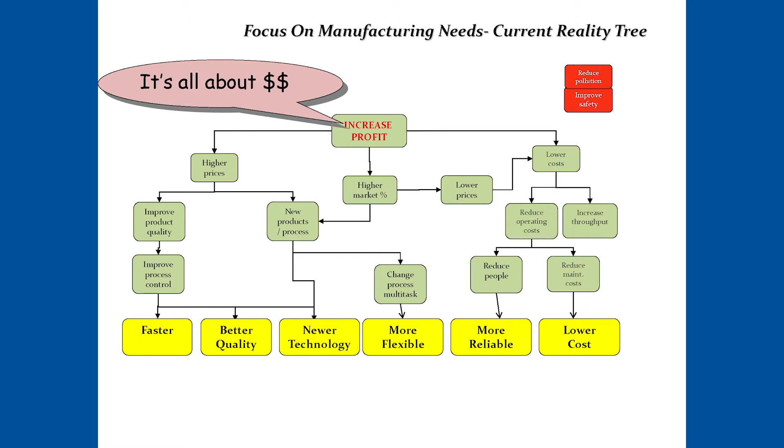As Joseph mentioned a moment ago, we have roughly 22,000 analyzers installed at Dow with a replacement asset base of about $1 billion. So if you ask our clients how important that investment is, I can promise you they're very, very keen on what we can do to keep those assets competitive.

In order to achieve that, oftentimes we have to think about how we compare to our competition. Because anybody with a big enough checkbook can buy a GC, they can buy an IR, right? So if everybody has access to the same technology, the same people, how do you win? Why you win is by identifying the most valuable opportunities to optimize the process, but also doing it better and faster than the competition. So a lot of our time is spent inside of the Dow fence trying to understand what are those opportunities and where are the benefits.

I would submit to you that that's the rate limiting step in continuous improvement. It's not necessarily the technology, although it's a key component. It's also understanding where are the constraints in your objective to make money. And the other fact of life today is that the EPC firms—engineering, procurement, construction firms—although they serve a great purpose for us, don't have the skills or the depth and breadth of skills in analyzers to do that to the extent that our clients need it. So oftentimes the burden is on us.

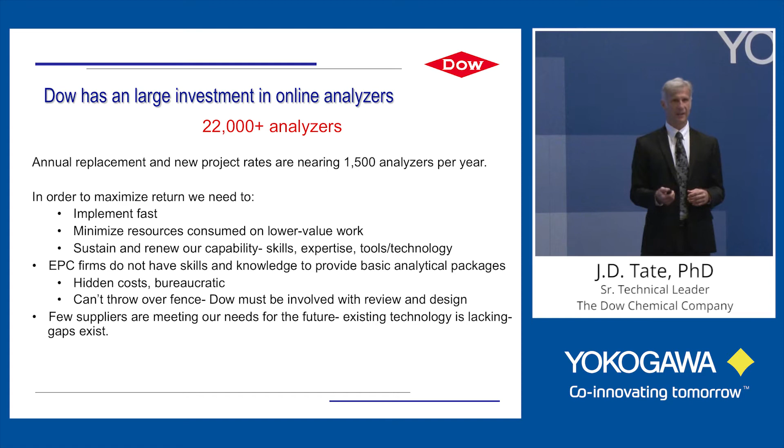If you look at the history, the evolution of analyzers in the industry, a lot of those analyzers came from the chemical industry or the refining industry. The GCs, for example, came from Phillips Petroleum years ago. It became Applied Automation in Bartlesville, and now Siemens owns that. There are many other examples like that. So necessity is the mother of invention.

I'm going to cover this real quickly because we agreed to compress our time here, but I think you'll recognize these in your own companies: there are basically three themes in the industry—operational excellence, capital efficiency, and life cycle management. That really is what everybody is doing. It's almost like communism, I think, in the petrochemical industry. So that just means doing more with less.

We also have some other corporate initiatives in Dow. One of those is energy efficiency—70% of our operating cost is associated with energy consumption. And of course, increased reliability. Reliability inside of our company sometimes has become a religion, but people forget quickly that it's a means to an end. You can make your plants 99% reliable, but it doesn't mean you're making money. So you have to choose wisely where you spend your time to improve that reliability.

And online analyzers are part of that story. Because one of the barriers to improvement is we have a culture of fixing problems, not avoiding problems. So we get rewarded for being heroes. Marcus and I were talking about this yesterday—we get rewarded for being heroes and fixing a problem, whereas the guys that avoided the problem, it's almost invisible. Nobody even knows that they avoided it because it didn't happen.

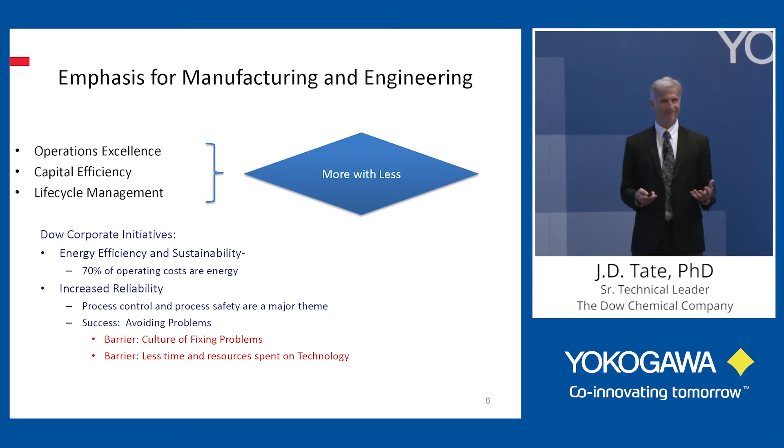And then less time and resources are spent on technology. So that's kind of where we are, kind of a chicken and the egg situation. So what are the needs and challenges?

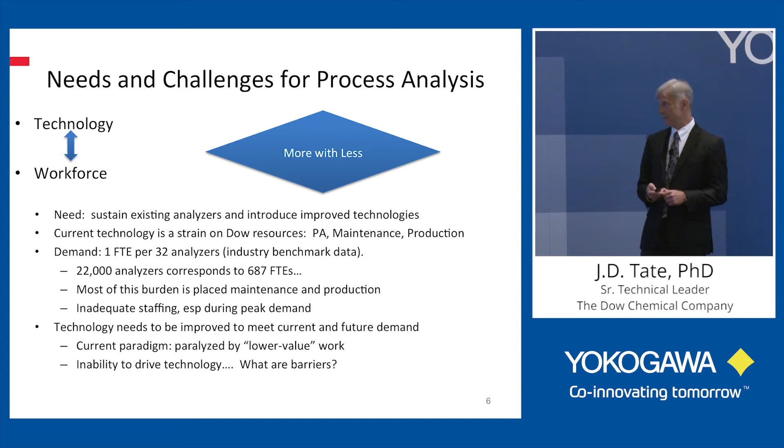Another really big challenge in our industry is the workforce. There's a trend for all of us to figure out how to cope with that paradigm, because our management isn't giving us permission to hire more people. In fact, they're challenging us to live with what we have and see if we can cope with that.

Here are two examples. On the left-hand side is a sample system. I couldn't tell you which process or which application that is, but lots of moving parts. Very complicated. It works really well when it's maintained, but somebody's got to walk by that thing and make sure that everything is working properly.

You'd be surprised how many times there's this ignorance is bliss. They don't know that the thing is not working. They get a number out of the analyzer, and they're fat, dumb, and happy. You go out there and discover, well, there's no flow. And if you had a smart sample system with diagnostics, you would know that there was no flow, and somebody would take action based on that information.

So that's the trend in the industry today, moving away from dumber devices to smarter devices with automated self-diagnostics, so that you have some credibility in your numbers and can trust the data. Trust usually means that analyzer is providing useful data to operations more than 99% of the time.

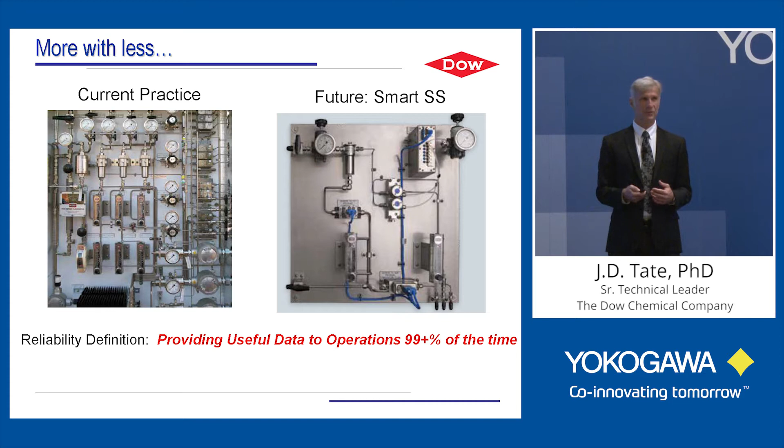If I asked you if your car didn't start one day out of the year, that's like 1 out of 365 days, you would say it's a piece of junk. You'd probably take it back to the dealer and say, this thing is not starting, I want my money back. And online analyzers are even more so. It's amazing to me how much we're willing to tolerate that unreliability.

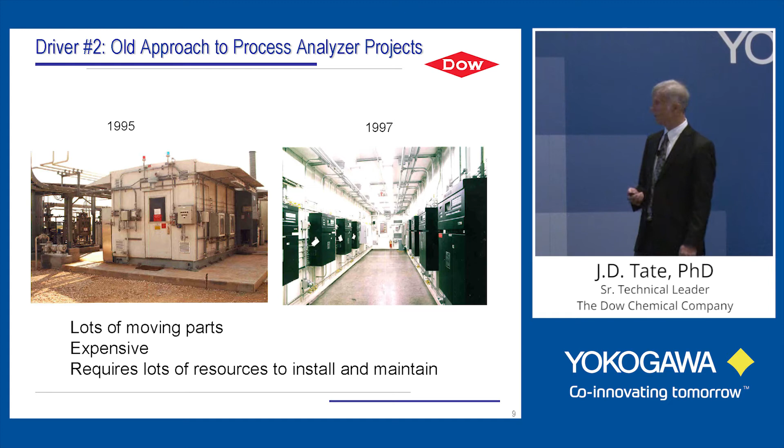Here's a picture of two pictures back in the 90s. Analyzer shelters. These were very well-designed, climate-controlled shelters. The one on the right is a bank of GCs in a hydrocarbons plant. Well-controlled, worked really well. Well, that was in the 90s, and this was just earlier this year. So it really hasn't changed much in the last 30 years.

And so, again, when we think about where we need to drive the technology, this is a clue. I'll show a story in a moment, but just to paint the target, I'm going to get through this really quickly, if you'll forgive me.

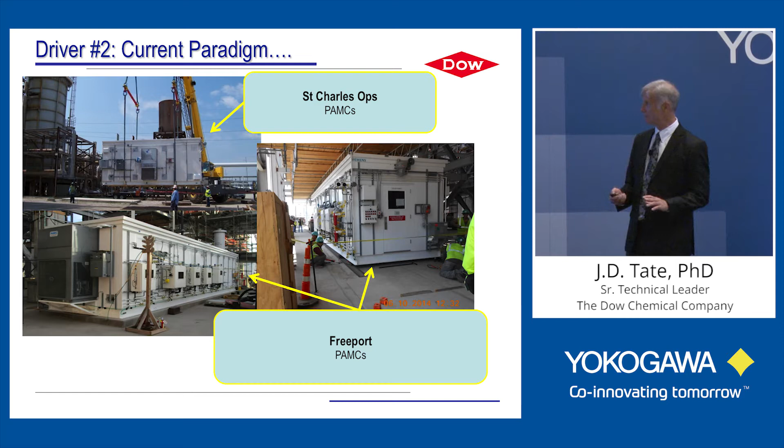Now, if I contrast that to pressure, temperature, and flow, right? You guys know this better than me. Dow, by comparison, I asked our instruments guys how many pressure, temperature, and flow devices we have installed. The answer he gave me was 700,000. That sounds low to me. I'm guessing it's more north of a million.

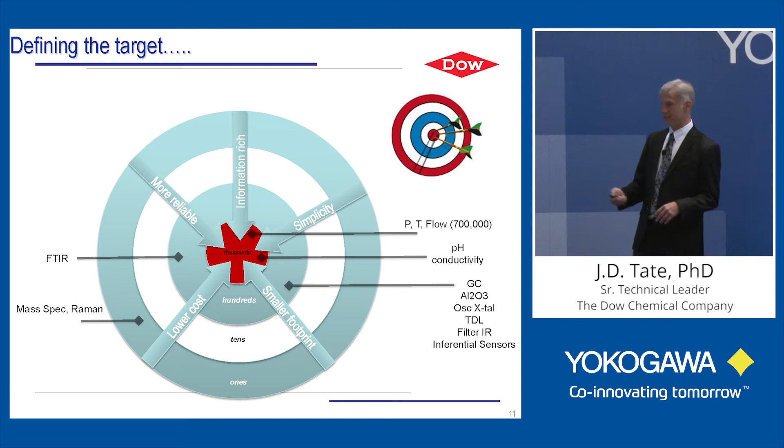Just to make the point, we have 22,000 analyzers, and in our industry, that's considered a big footprint. But we have more than 700,000 pressure, temperature, and flow devices. So our clients want to use analyzers. They have a desire to use analyzers, but there's a barrier. Cost and complexity, the footprint, all these things I have on this slide are those barriers.

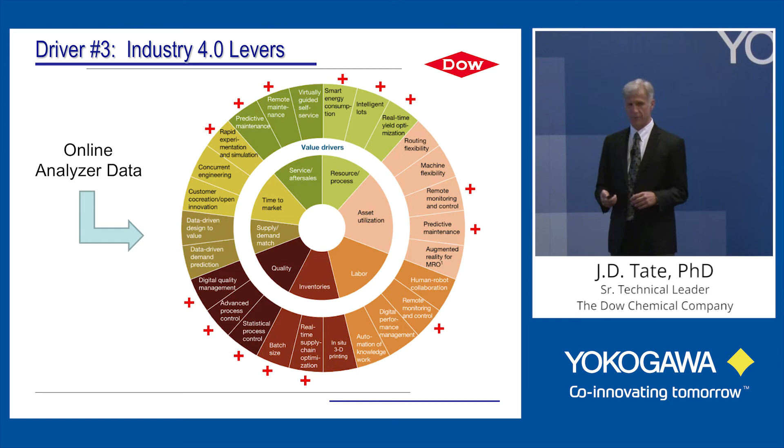Here's one of the other drivers I think you'll all resonate with, this concept of Industry 4.0. You can look at all the value drivers for Industry 4.0, and I would say most of those intersect the objectives or benefits of online analyzers, including optimization, predictive maintenance, you name it. So there is a goal that's lined up between that vision and this enabling technology.

But there are some things required to take us from where we are today to that vision. Some of those are reducing the cost, complexity, and customization. There was a time when we had our own instruments group. We would build these analyzers in our shop, build the electronics, the software, integrate all the components together, and install it ourselves.

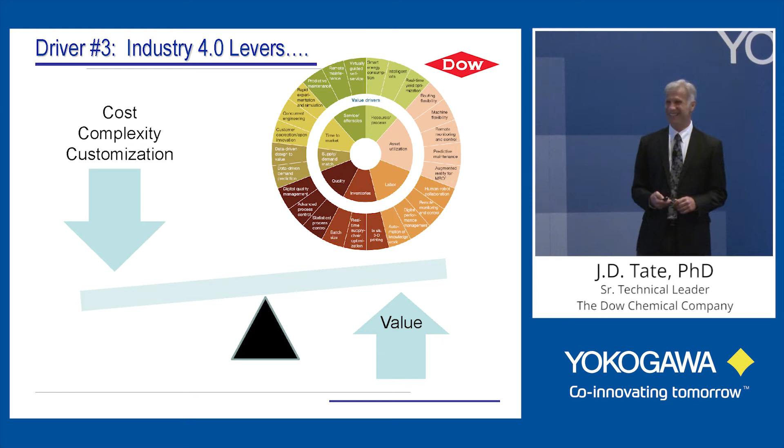We don't do that anymore. We can't afford it, and the industry can't afford that. And we still have some of those legacy systems in the field today. It's amazing. So that's one driver.

The other driver is keeping our assets competitive. A lot of our assets are near the end of their life, and one day will come when the analyzer doesn't work anymore, and our clients need to fix it. And sometimes the analyzer, you can't even buy it anymore.

It doesn't exist. We started buying old computers off of eBay because the new computers are not compatible with the old software. And we'll pay a premium for those computers because, I hope I'm not telling anybody that owns those computers, we need those computers to keep that asset reliable.

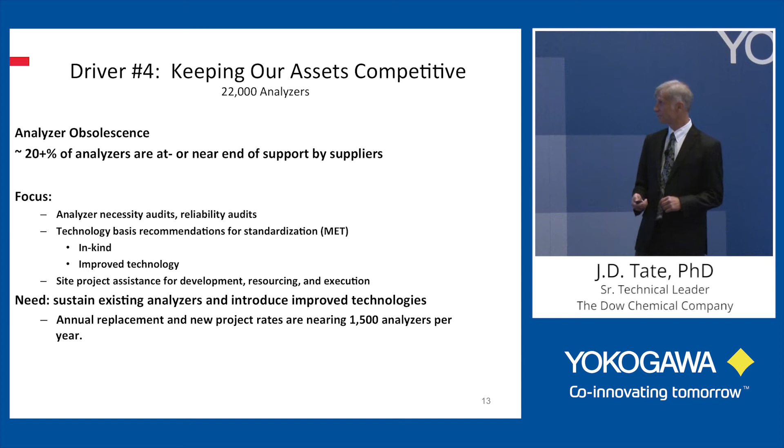So, keeping our assets competitive. I show this slide, and sometimes it upsets people that are in this list, but it applies to a lot of folks, not just these guys. It's true that a lot of the technologies we have today are very successful, but they really haven't changed much in the last 30 years or so. GCs, IR, there's a few examples. I think TDL is the most notable example of change, but there aren't many examples like that.

So I can summarize some of our drivers, some of the key requirements for our analyzers. We need technologies that don't require expensive analyzer shelters. We need analyzers with faster speed of response. We need analyzers that don't require sample transport. If you could put a probe in the process and not transport the sample, you've solved a lot of problems - sometimes you've created some problems. It needs to be more reliable, lower maintenance.

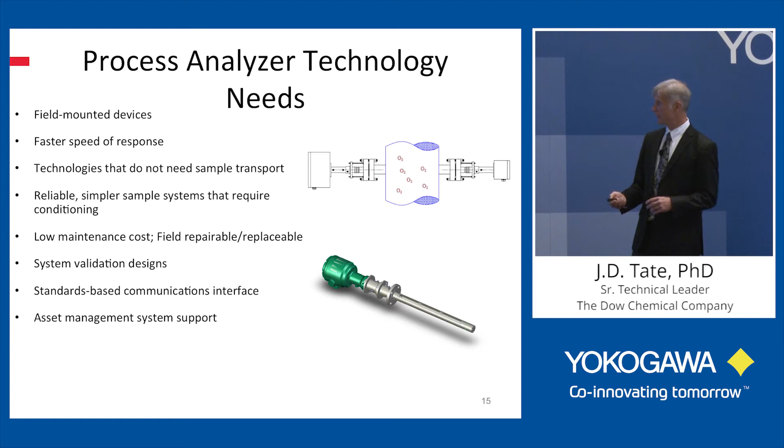More standardization, and asset management support systems - having these as part of what we call a process analyzer resource management system, where the maintenance guys can look at that and say, yeah, this analyzer needs the filters plugged, we need to go out there and fix it. These are some of the ideas. We can drill down into some of the nuts and bolts here.

So this is our vision of the future. Again, I showed you that slide of the modern analyzer shelter. It works really well, provides useful data to operations - they trust it, makes a lot of money for the company - but there's a limitation on how many of those we can afford and how many we'll tolerate.

And so there's a trend in the industry to move towards more field-mounted devices - things that don't require a great deal of support and demand on our time and resources. This one shown on the right here is an in situ probe placed on a piece of fired equipment, and there's more and more of those coming out today.

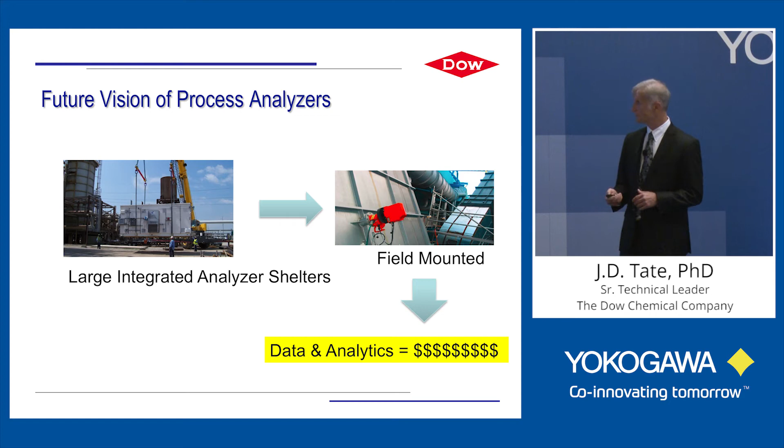I want to make a point here, that it's not really a new concept to have field-mounted devices, right? That's been around quite a while. And one of the best examples I can think of are the shelterless GCs.

I don't know if some of you are familiar with the old Daniels GC that they used in pipeline, liquid natural gas. They have thousands of these things installed in the field, don't require an analyzer shelter, and are very reliable, and provide a lot of useful information to the client. But it hasn't enjoyed widespread success in the chemical industry. There's been several products on the market, several companies that have developed their own version of the shelterless GC, and we have a few of those installed, but not many.

And the vision there was that instead of having an expensive GC in a climate-controlled shelter, we would place this thing at the pipe and get the benefits of not having all that infrastructure, and even having a modular device where if something failed, you replace it with another one, and you're not doing field repair.

And I had a lengthy debate with our clients about this - that there's still a psychological barrier to that paradigm. They're used to doing field repair, and if you're going to do field repair, especially in Texas, you want to have a nice climate-controlled shelter, especially when it's raining or there's mosquitoes or whatever out there, right? You want to have a place where you can perform the maintenance. That's a different mindset than having a device that's mounted at the pipe, and if it fails, you don't do repair in the field - you swap it out.

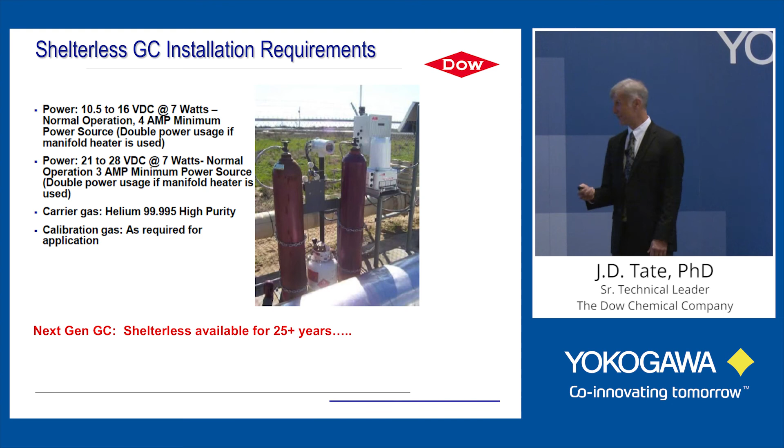So a good benchmark is the zirconium oxide sensor, right? This is something that can be mounted in the field without a PhD. It works. Now I know Don's going to look at me crazy and say, why are you still using Zerks? You shouldn't be using Zerks. And I agree with him, Don and Ryan too. But we have an answer for that, right?

But it's a good standard. I mean, every car has 2 or 3 of these sensors installed on them. They work. They're very reliable in their application. They had some drawbacks, and we can talk about that. But as far as a goal, when this technology became available back in the 80s, it revolutionized combustion control. And I think our goal is similar in other applications besides oxygen.

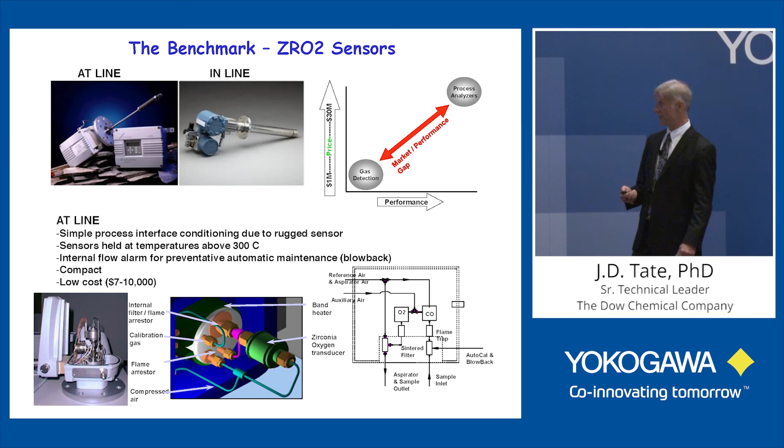Here's an example. I think this is an e-book that I stole liberally from our friends at Yokogawa. Thank you, Joe and Ryan. That describes the benefits of this technology.

It's interesting to me because maybe 5-7 years ago, there were very few suppliers in this market. There were a lot of suppliers that were selling into that. I mean, the first time I saw this technology was in environmental monitoring. They're using open path monitors to monitor fugitive emissions. And so you could monitor a large area of space in a short period of time at a low cost using these open path measurements, up to 1 kilometer or more path length.

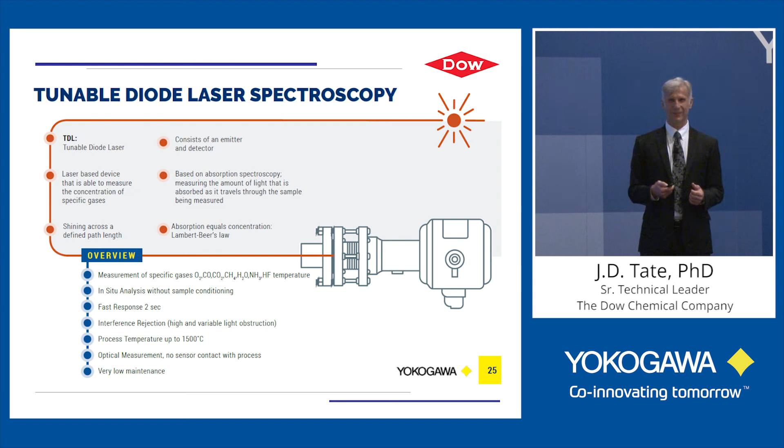But nobody had discovered the benefit of applying this in the process industry. There were some examples in the power generation market, but today you go to most trade shows, and there's maybe a dozen suppliers out there today that are trying to jump into this market because they see the benefit.

And one of the reasons is because it's a very reliable device. The laser source itself is telecom grade components. We're leveraging a mass market from the telecommunications industry that just happens to overlap, fortunately, with some very important compounds in the industry. Oxygen is one of the most ubiquitous compounds in the chemical industry.

Everybody wants to monitor oxygen. Everybody wants to monitor water. Everybody wants to monitor CO. So it's convenient that this technology is able to monitor those, and it can be mounted in the field and doesn't require an army of PhDs to maintain.

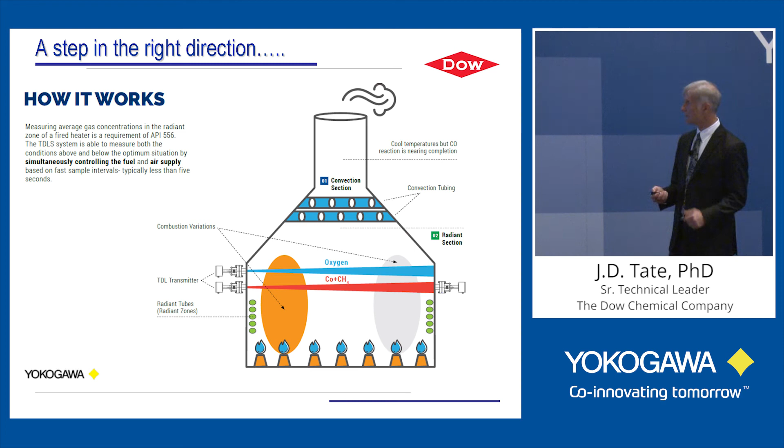We have hundreds of these installed at Dow, and they're slowly taking over a lot of applications that were traditionally paramagnetic analyzers, electrochemical, and others like that. One of the applications that we're interested in, we've co-developed with Yokogawa years ago, is combustion. And it lends itself very well because you can measure oxygen, which you need to run to do it safely, but also to measure CO, because CO is a very important compound in combustion because it's related to safety and efficiency. And if you're not measuring the constraint, you can't really optimize.

So this has been one of the true success stories in our industry in the last 10 years. And it requires a lot of collaboration with companies like Yokogawa. So that's been a really fun project and great story.

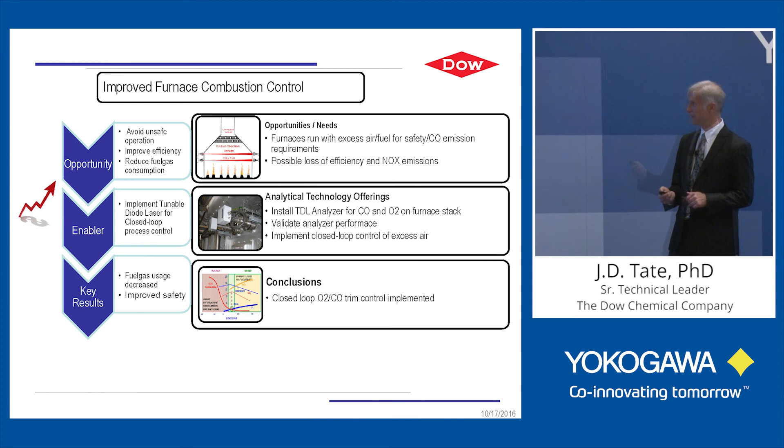I'll go quickly through this, but the point I was trying to make a moment ago about what is the rate limiting step in developing a technology, and it's oftentimes the value proposition. If you think about it, if you're trying to ask somebody to do something different, you're asking them to make an improvement, what data do you need in order to drive that decision? And oftentimes, if you're just walking in there and say, well, it's better, they're just going to look at you, pat you on the head. I can't tell you how many times that's happened to me. So it's not a level playing field because there's already a built-in bias or prejudice against change.

Nobody likes to change. And so in order to drive that decision, you had to have a credible, defensible argument to make the improvement. So my argument here is that what's really rate limiting in our improvement is not necessarily the technology itself. It's understanding what are the benefits and making that in a credible, defensible way.

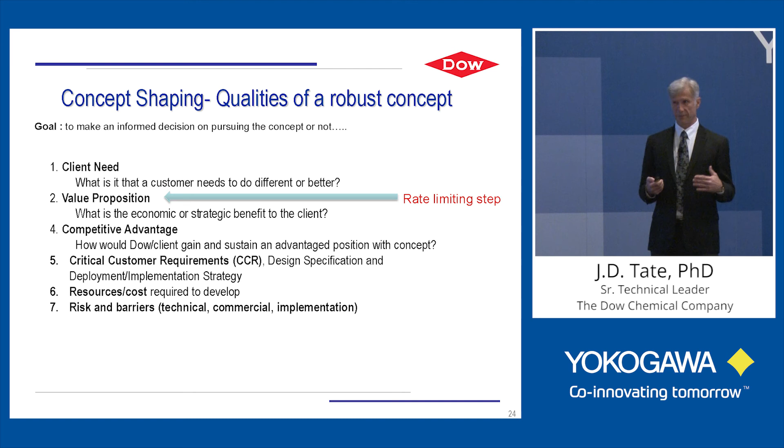And continue. So the message here is that we can't sit back on our laurels and just wait for this stuff to come to us. We have to drive it and have to push it. So the next step change is here. I've just shared some of my ideas anyway of where we think the barriers are, where the paradigm changes are, and it's up to us to make those changes.